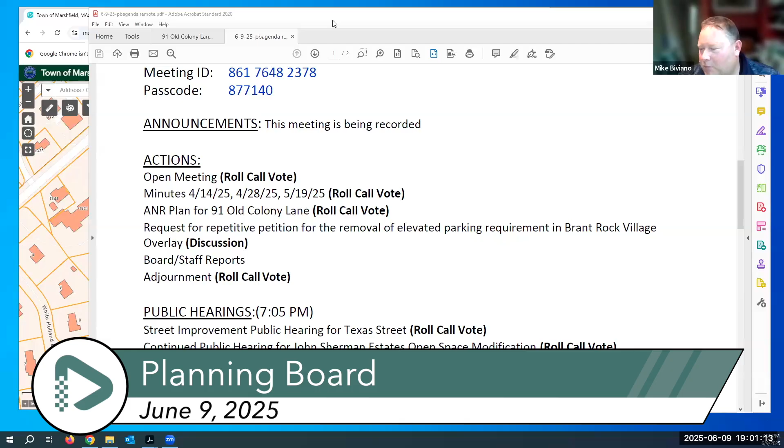Sorry, somebody's giving me feedback. I'd like to say something, Mr. Chair, if at all possible. It's up to Mr. Duffy.

All right. Oh, thank you. Who did that? I just muted her. You are the best, Karen.

So, Judith Crowley, we could hear everything you were yelling. I appreciate you interrupting the meeting. That was very helpful. All right, we're going to get going again now that we can hear ourselves.

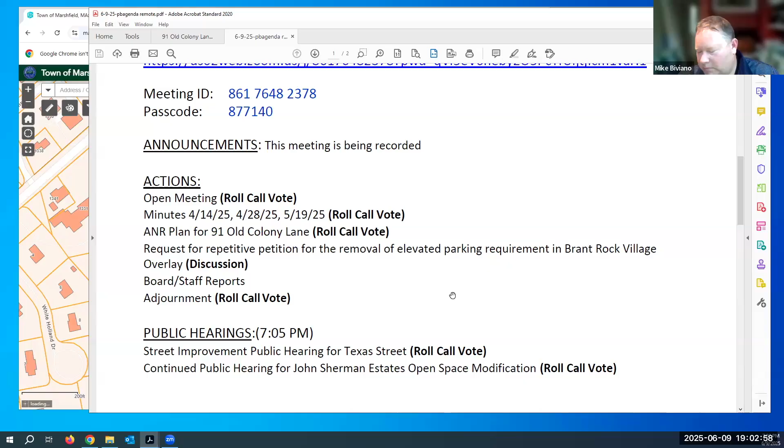At this time, I'll make a motion to open tonight's public meeting and waive the reading of the notice. Is there a second? Second, Katie O'Donnell. Katie O'Donnell, aye. Thank you, Nick. Nick Papastratus, aye. Fred Monaco, aye. Kevin Campbell, aye. and Mike Biviano, aye.

Okay, I'm going to make a motion that we approve the minutes of 4/14/25, 4/28/25, and 5/19/25. Is there a second? Second, Katie O'Donnell. And I'll vote on the 4/14 and the 4/28, but I wasn't there at the 5/19, so I won't vote on those.

Katie O'Donnell, aye. I think you can vote on them. You just don't. No, that's fine. So we're just going to take the first two then, because you're part of that vote. Yeah, I mean, I read the minutes of 5/19. I can vote on all of them. I just wanted to note that.

Great, perfect. So, Katie O'Donnell, aye. Thank you, Nick. I was also not part of the 5/19 meeting, but I did read the minutes, so I'll vote for all three. Nick Papastratus, aye. Thank you, Kevin. Kevin Campbell, aye. Fred Monaco, aye. And Mike Biviano, aye.

Okay, thank you. All right, we got a couple minutes before the public hearing. So, Greg, what's this request for a repetitive petition? Can you please explain why that's required?

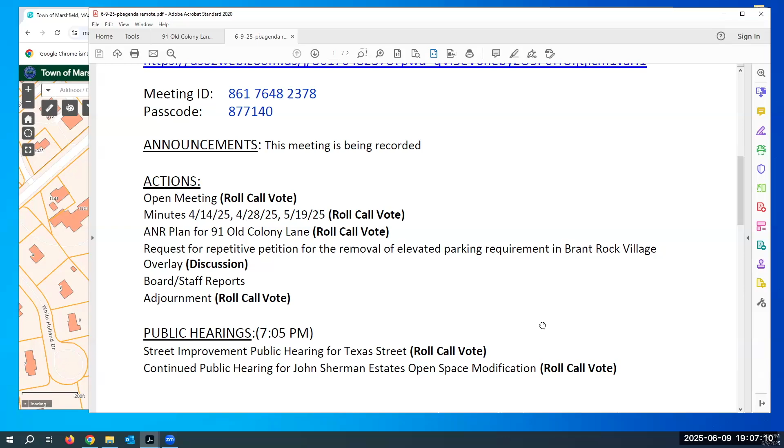Yes, this is Greg Morse. Hi, Greg, how are you? Good evening. Great, you want to share the screen? Yes, please. Okay, just bear with me one sec.

Okay, you should have the plan up in front of you. Can you see that? We can, yes. Great, thank you. For the record, my name is Gregory Morse. I'm a registered engineer with Morse Engineering. Tonight I'm representing Zorge Holdings LLC, who submitted a plan for a street improvement on Texas Street.

Texas Street is in the Kent Park neighborhood off of South River Street. Texas Street was originally laid out in 1920. Portions of it have been built. This portion has not been built.

Familiarizing you with the plan here, this is Washington Avenue here. Texas Street, where my cursor is, is unconstructed between Washington Avenue and Wellington Avenue on the left-hand side of the screen. The proposal here is to construct the new road starting at the Washington Avenue intersection and coming in approximately 173 feet. It would provide access to only one single-family house lot, parcel I-11-2409, which has been deemed a residential lot of record.

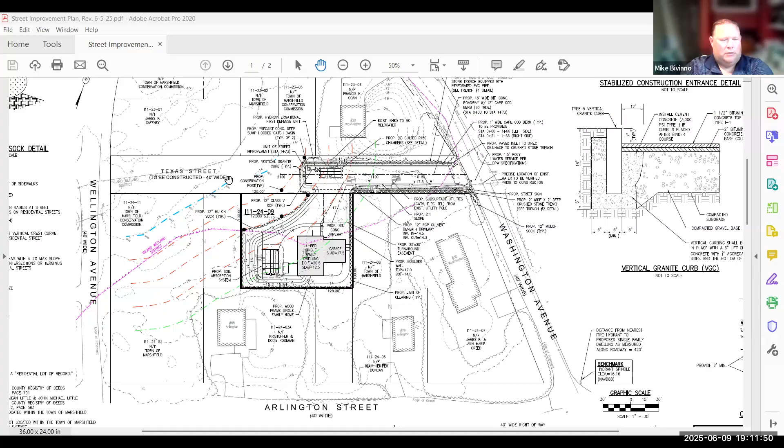Why don't you go over those now so we know what they are? Sure. So waiver number 1 is in regards to the subdivision rules and regs 7F4, which requires sidewalks on a street. There were no sidewalks anywhere within the Kent Park neighborhood. We weren't proposing sidewalks as part of this street improvement.

The second waiver was in regards to section 9D1, which is the curb radius. Typically at the intersection where the pavement rounds a corner like this, the board requires a 30-foot radius on the curb. We're able to provide that 30-foot radius on the southern curve here, but on the north curb, we're only providing a 10-foot radius.

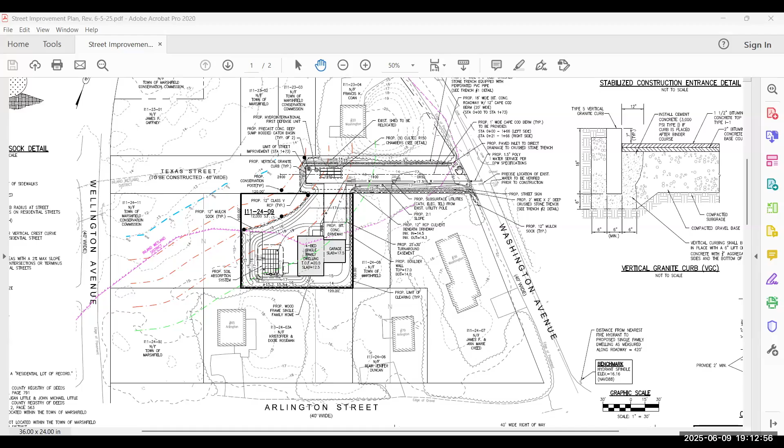We can't fit a 30-foot radius within the existing street right-of-way layout. The third waiver is in regards to section 9D4, which is the K value associated with a vertical curve in the road. If I go to sheet 2 of the plans, you'll see the roadway profile here.

This would be the intersection of the street. We're coming in at a 7% grade for approximately 25 feet before we taper off and then go at a negative 0.5% grade to the back of the project where the catch basin is. The transition between that negative 0.5% and the 7% coming in off the street is referred to as the K value.

By having a K value of less than 20, it allows us to take more stormwater and send it to the back of the site where it's going to be treated through a catch basin and dry wells, versus if we had the K value of 20, it would make this vertical curve longer in length and direct more flow toward Washington Avenue, where there is no drainage existing.

The fourth is in regard to 9D8, which is the requirement that the first 50 feet of road have a 2% leveling area. Again, we're coming in at a 7% off the street for approximately the first 25 feet, and then it transitions to a negative 0.5%. The leveling area at 2% really wouldn't be feasible to comply with the drainage and groundwater conditions at this site. So we've asked for that waiver.

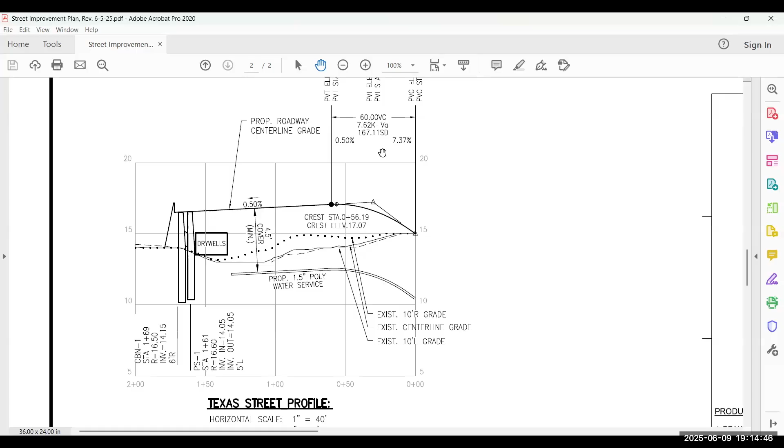The last one is in regards to section 10D, which is the proposed water line. The requirements are that an 8-inch water main be installed. Our proposal is to simply install a single water service here from Washington Ave down to the house. There is a fire hydrant right up the street on Washington Ave within the 500-foot proximity of this house. Running an 8-inch line in didn't seem appropriate for one single family home. That concludes it, Mike. Okay, thanks, Greg.

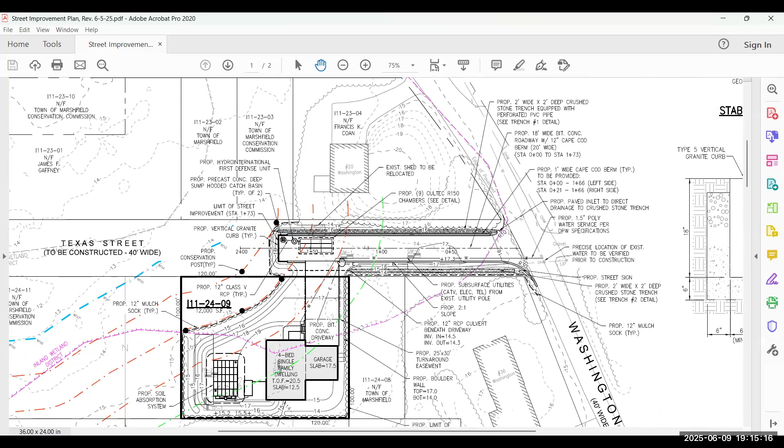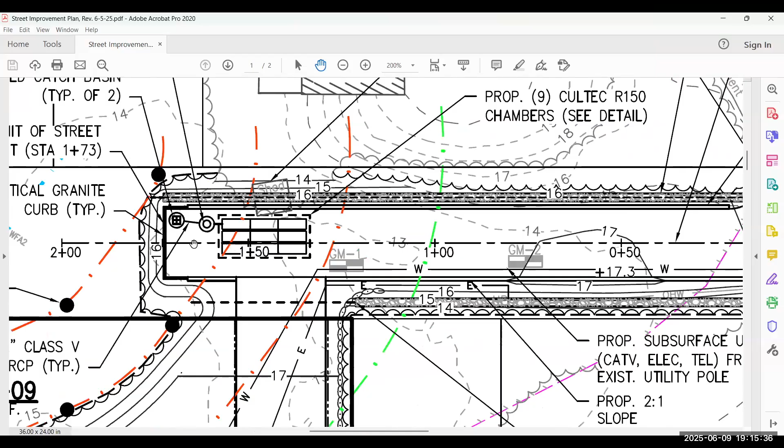How come you guys didn't run through the frontage all the way through the lot? Sure, you are only required to improve a portion of the frontage, not the entire frontage. How much is proposed? I believe it's approximately 173 feet. And that's what you need for your residential lot of record? That's correct. The presence of the wetlands off-site here would probably prohibit construction of Texas Street across the entire frontage, but we are able to get enough, the 173 feet being constructed, for the residential lot of record.

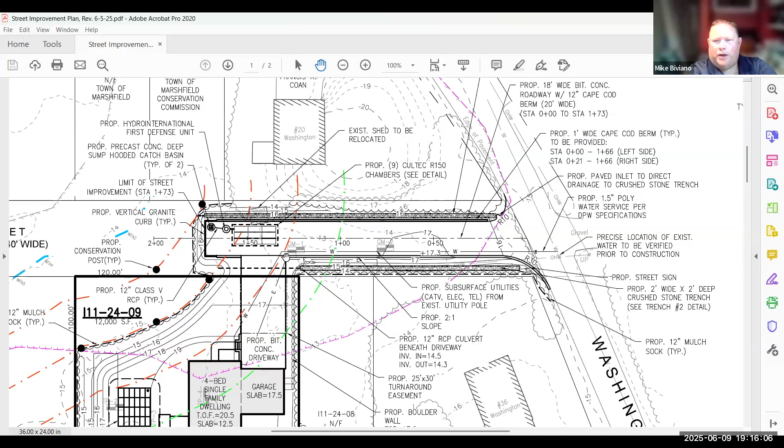Okay, sounds good. We're going to go to Pat Brennan, but do any of the board members have any questions beforehand? Okay, seeing none, Pat, I'll let you go.

Okay, thank you, Mike. Yeah, so I reviewed the project, submitted a letter to the board dated May 7th. And as Greg mentioned, they revised the plans based on that letter. The major change from the initial set of plans to this one is super elevating the road. On the original set of plans, they had a crown in the road and a pair of catch basins at the end, but the problem was that all of the stormwater from that first roughly 56 feet of roadway was going to go out onto Washington Avenue uncontrolled.

By super elevating the road, what they've also done is proposed a break in the Cape Cod berm right near Washington Avenue and a crushed stone trench along the north side of the road so that they can capture most of that stormwater and put it into that crushed stone trench. That was really my biggest concern, having that stormwater going out into Washington Avenue, and this pretty much prevents that. So it addresses that comment, as well as the other comments that I had related to changes on the details and so forth.

But those were my, that was my major concern. I know that Greg Guimond had brought up a couple of questions.

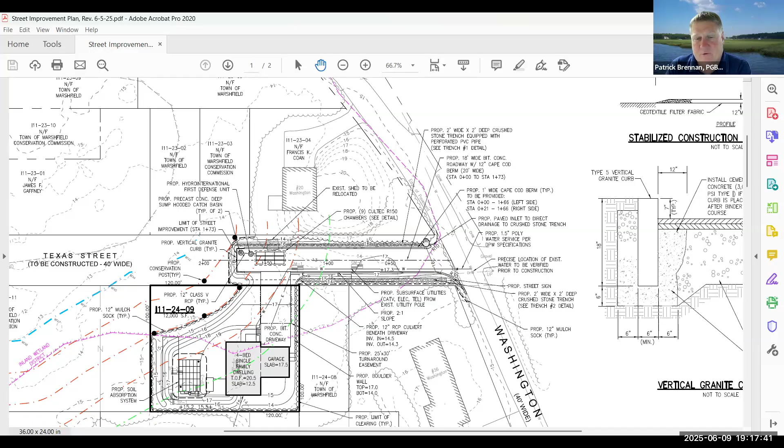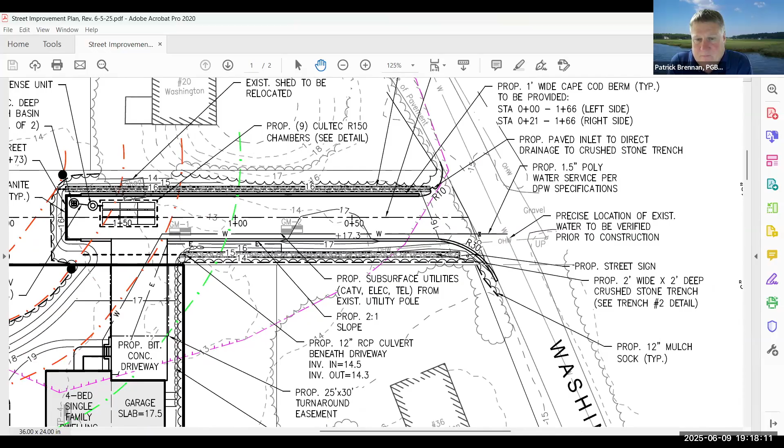There is a 4-inch perforated pipe in that northerly trench, but the end of it looks like it ends at the 25-foot no-touch zone there, but it's just not labeled, so it was unclear. And then I think we both also have a question on the transition. There's a crushed stone trench on the south side of the road that goes into a 12-inch culvert that goes under that proposed driveway. We just need a little clarification on what the transition from the crushed stone into the culvert would be, if it's some type of structure or what that is. But that's it at this point.

Okay, so all your concerns were addressed with this new plan? Yeah, except for those two, that one question basically is that transition.

Okay, Greg Guimond, do you want to go? The one other issue, I talked to Conservation Commission this afternoon, and one of the things they need to decide is, in the past there was an isolated wetland in the right-of-way, which could affect the construction of this road. So after we hear from the public, my recommendation would be that we continue to the June 23rd meeting, because hopefully by then we would know if there is an isolated wetland involved in this project.

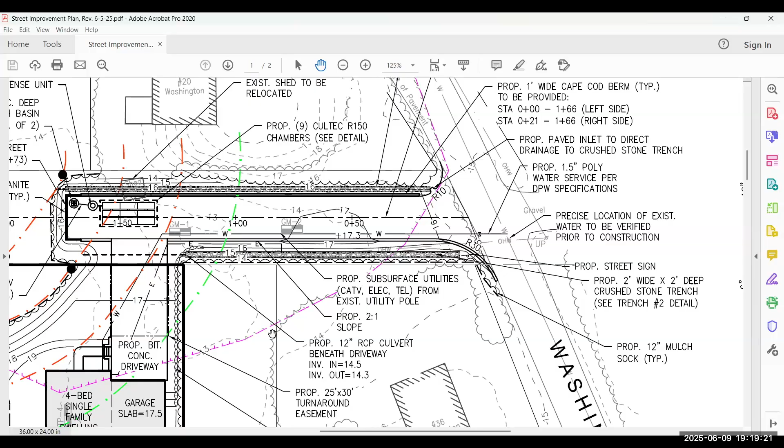Okay, Greg Morris, what are your thoughts about that isolated pocket? Sure, so we were made aware that there was a previous filing on this property which did have a wetland, kind of in the area where my cursor is right now. Our wetland scientist did not find it when he went out there. There's also been some changes in the regulations and changes in the definitions of what a wetland is in the town of Marshfield under the local bylaw. What's out there certainly doesn't meet the state criteria. Conservation Commission, nonetheless, has scheduled a site visit for June 17th, I believe it is, to confirm whether that wetland exists today or not. We don't believe it does.

Okay, so I think it's probably best to wait until after we hear back on that from the Conservation Commission. And Mike, on the waivers, the first waiver is not required for street improvements are not required to have sidewalks, so we don't need to worry about that one. Okay, Greg went too far.

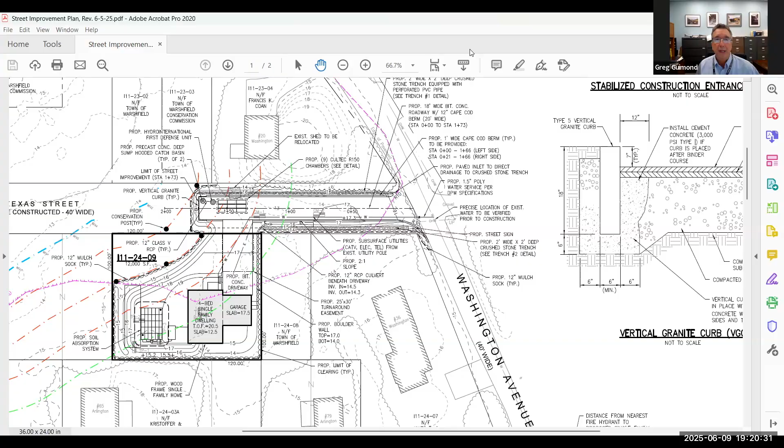All right, so any other questions from the board before I go to the public? Greg, could you stop sharing so we could see the screen in case people raise their hands? Thank you, there you go. Okay, so no questions from the board right now, but is anyone here from the public for this?

Okay, Jay Creed's up. James F. Creed Jr., 36 Washington Ave. My property is located on the southerly side, abutting Texas Street, the portion that's to be improved.

My sole concern is with regard to what previously was an isolated vegetated wetland. It may or may not be a wetland according to the Conservation Commission's new definitions. However, I can tell you that it regularly ponds with water up to 12 inches and more deep in the center, which runs—if you put up the plan again, I can give you an idea of where that ponding occurs.

I've also submitted— Jay, I think that's mostly a conservation issue, they're doing a site visit to determine themselves. My concern is you're talking about building a street and elevating it in an area directly through where this water ponds. So my concern is for my property. I already get water on my property probably 80% of the year.

80% of each year that I've lived there, at least once or twice, a pond which covers most of where Texas Street is going to be built gathers and is anywhere from 8 to 12 inches deep. By building a road, my concern is that I don't want to get any more water. I've submitted the letter I submitted to the Conservation Commission, which shows at the end the April 2024 flood that created that ponding area. I've also submitted a picture of the mounded system built at 41 Washington Ave, not because it impacts this project, but to give you an idea of the scope of the elevations on the building lot. So all of that water is going to shed off, and I want to be assured this plan is engineered so it doesn't create any more runoff on my property.

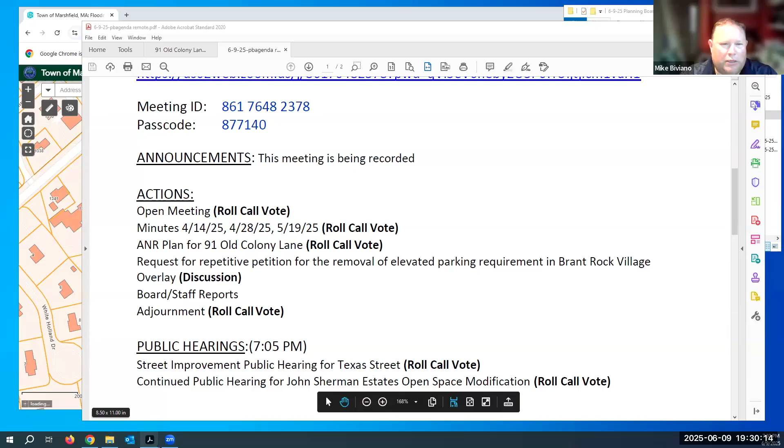All right, I think we're just going on to staff report. You took care of the minutes. You got the ANR plan. You didn't do the ANR plan yet. We didn't? Oh, we did not. I'm sorry, how'd I skip that?

All right, so is the ANR plan up on the screen? Okay, I got it this time. Old Colony. Yep, I see it. So do we need to open that or anything?

It conforms. It's actually double the size it needs to be. It has proper frontage. It has all its setbacks and stuff shown. We checked with town counsel and he said, nope, you guys can go ahead and sign.

Okay, what's happening? I don't know what the ANR is. So it is the property next to the airport. There's an older house on there. The current property owners are thinking about putting in a heliport there, taking down the house and adding a heliport.

That's a matter between the Marshfield Airport, this applicant, and the FAA. As far as we're concerned, on an ANR plan, it meets the requirements for an ANR plan.

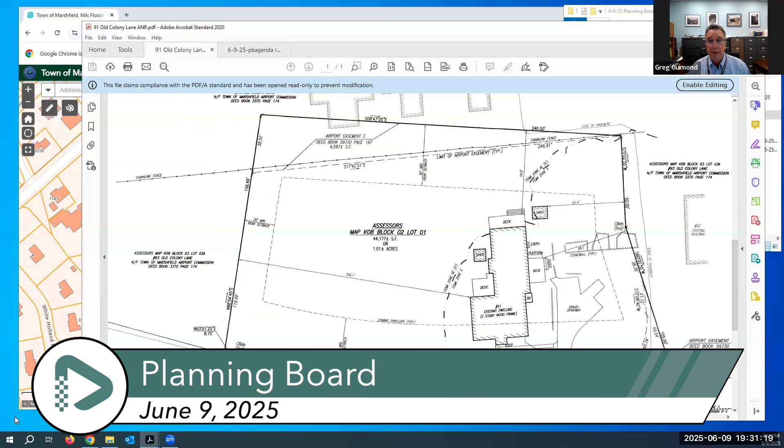Okay, that's fine. Any questions on the board? Any questions from the public? Okay, seeing none, I'm going to make a motion that we approve the ANR plan on Old Colony Lane as shown on this plan. Is there a second?

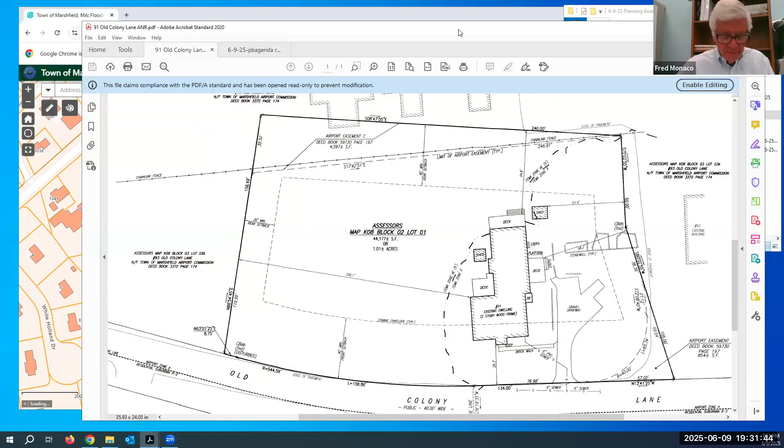Second, Katie O'Donnell. Katie O'Donnell, aye. Nick, Nick Papastratus, aye. Fred, Fred Monaco, aye. Kevin, Kevin Campbell, aye. And Mike Biviano, aye. Okay, sorry, I missed that.

I'll let you go on, Greg. As I mentioned to the board, it sounds like the MBTA communities towns' arguments have been dismissed by the judge.

And the select board is going to have to think about what they'd like to do. I guess they could appeal to the Superior Court, or we could return to fall town meeting with an MBTA communities article. If that's the case, the latter is the case. August is the deadline for getting zoning language.

So Karen and I would be doing a deep dive to prepare for that if that's where we go. I think it's the select board's call, and we need to be ready to react if it goes with a zoning change versus an appeal.

Okay, what happens right now? Can anyone file for a building permit under this at this point?

There is no zoning district created, so I personally don't think so. I know Bob Galvin thinks there is a possibility that somebody could try to push that. We wouldn't approve it, meaning the town would not approve it, and then they would have to take us to court.